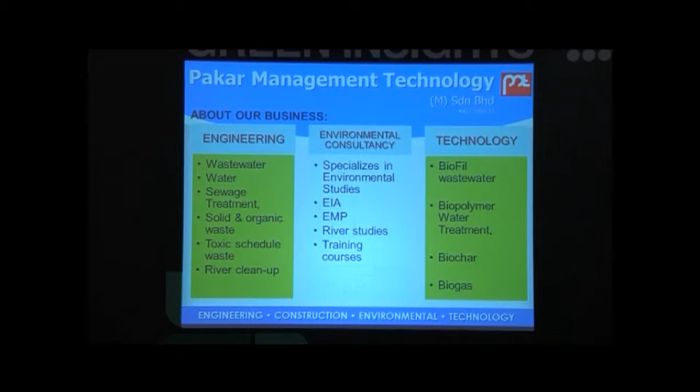On your far left, this is engineering: water, wastewater, turnkey, contractor, consultant. In the middle, EIA. And at the far right, the technology that we are marketing in this hall today. I will elaborate there about 4 or 5, okay?

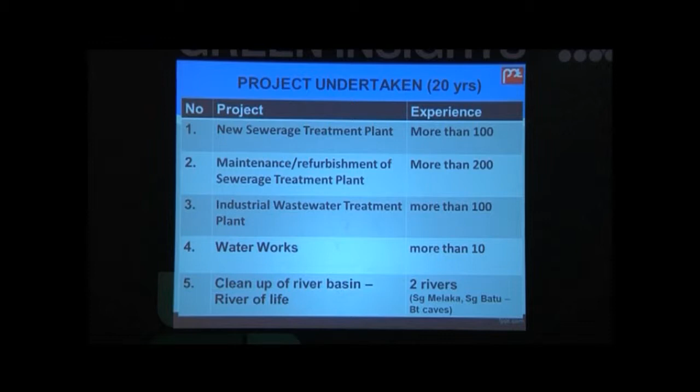The company does sewage treatment as a core business. They do refurbishment and maintenance on STP. They do industrial effluent water treatment, design build. They do water work, and they also do clean up of rivers.

This is the latest addition: Sungai Melaka and Sungai Batu. This is what we do, okay? Clean up of the river, under River of Life.

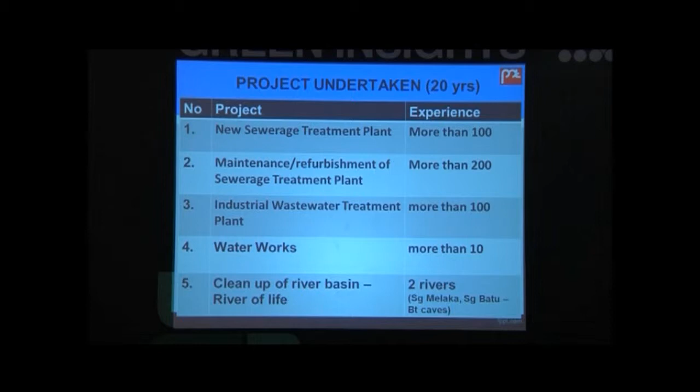What is green, okay? I think most of us know the word go green, but what actually does it mean by go green? So a little bit of some definition. I think some of you may know go green means sustainable approach in today's activity. So in our case, go green means sustainable approach in today's business, waste management, particularly wastewater management.

I'm going to focus on that. But Go Green is also resource recovery, penjimatan sumber, okay? It makes sense for us to protect our resources for the future. Actually, we have to, okay? For the sake of mankind, we got to preserve something for our kids and our young generation.

So, but there is more incentive, more opportunity for us when you do green business. And you are going to have lots of opportunity when you do go green. You will see IGEM is a very big show. For the last 3 years it made very big sales, billions, in terms of opportunity and contact. So it's a good platform to work on.

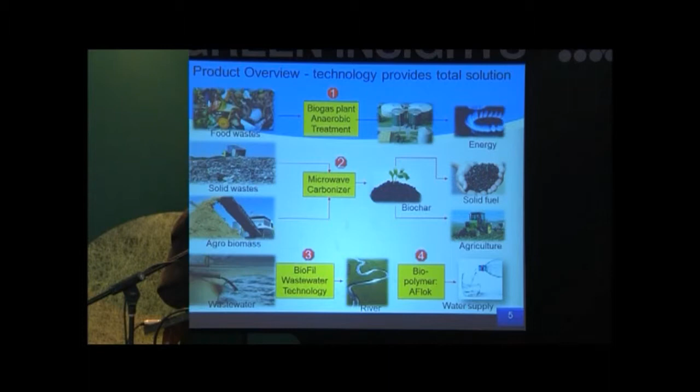Okay, now I'm coming to, because I don't have much time, I'm coming to the overall scenario on what the company offers at the booth there. We are on D80, D80, in Hall 2. I got number 1, which is a biogas plant, solving food waste, on your left, okay?

I got number 2, microwave carbonizer, turning garbage or biomass into charcoal, biochar we call it. We have number 3, treating wastewater from the city, from your sink, from your kitchen, from your industrial wastewater, for discharge. But lately we have the 4th, latest innovation, treating water without any chemical. So we got 4 products. If you are interested in more detail, please go to D80 after this, right?

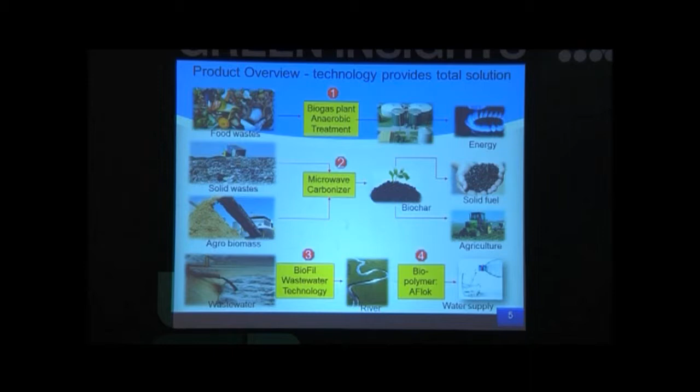Okay, a little bit about the product. What we intended to do, number 1, is to make food waste into biogas. I think it's not new to some of you, but this time we miniaturize. We make things which are big into smaller kits.

So when we talk about biogas, we talk about kitchen waste. We are just focusing on restaurant waste, catering, highway, wet market — very simple application. It is a community project.

Number 2, we have what we call a carbonizer. Actually it's making charcoal, but for the first time we make charcoal from microwave. So you can imagine, in your home, a microwave can later be modified by our team to make a carbonizer, meaning you can make your own charcoal in your own house using your own waste. That's my dream, okay? But we got a 10 ton a day plant in Kelantan. You can see more detail in our book.

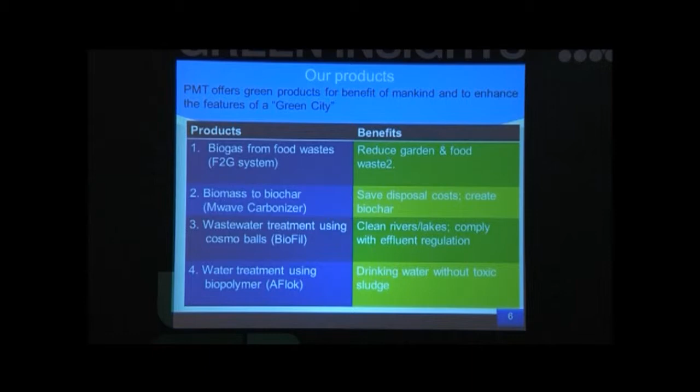Number 3, we are using BioFil. BioFil is a biofilter — we are treating wastewater with half the size that normally people require. This is for sewage treatment plants, also for river cleanup. That's number 3. Number 4, we have natural biopolymer. It's a kind of product developed and produced by microorganisms. We intend to offer an alternative.

If you use alum sulfate for drinking water, now I think there is an alternative. You may not have to use alum. We can have a natural product. We have no sludge, okay? So these are the main highlights.

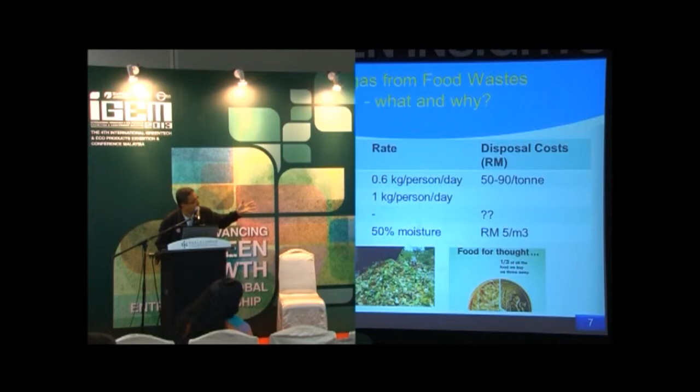Number one, quickly, I think the issue in food waste is always the kilogram. If you are aware, we throw about 0.6 kilo per person per day from every person, but in total we actually throw 1 kilo per person per day. This is the garbage that we throw in.

And then it's always the cost that matters. But since we do not handle costs, the costs are handled by local authority or developers, so it's all silent. But for government, they want this project because of the cost, okay?

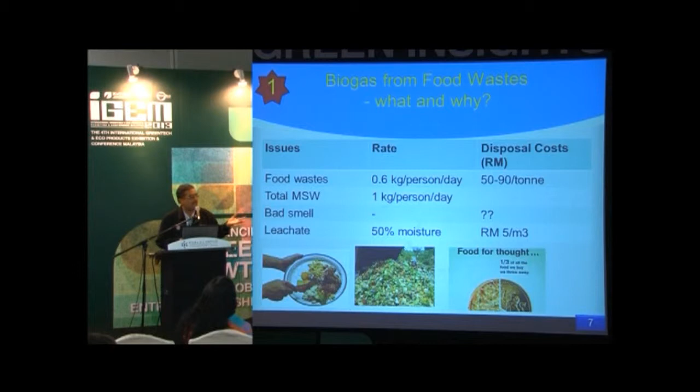And you do not know that there is a leachate. Leachate is the water that comes from our dustbin, which is black liquor, very smelly, and very difficult to treat. It will cost you something like 5 ringgit per ton, and it's going to be lots of tons, okay? So these are the issues.

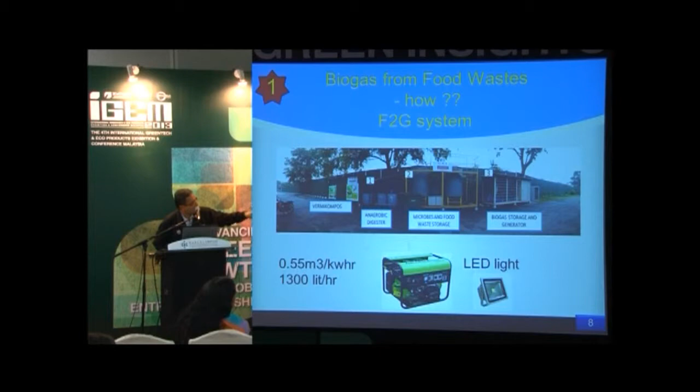How can you solve that? Very easy. We have our project, this is biogas from food waste, F2G, food to biogas. We have 3 cabins there: on the left, it's a vermicompost; in the middle, we have a biogas; and on the far right, we have a 2 kilowatt engine.

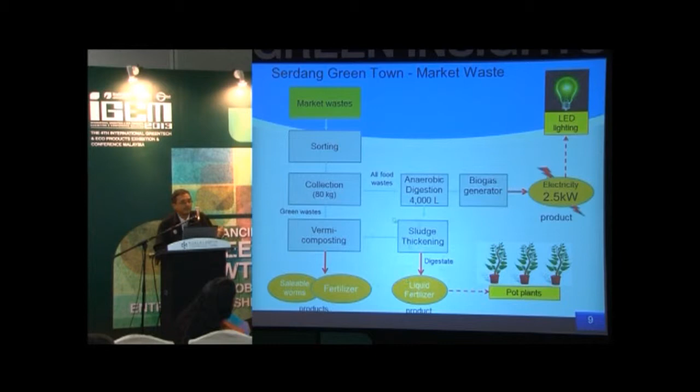Putting into cabin, this is what we do with market waste, okay, from the top market waste. And then we do sorting, and then we have a collection. We can do 80 kilo in a small unit. We can generate 2.5 kilowatt at the far end, okay?

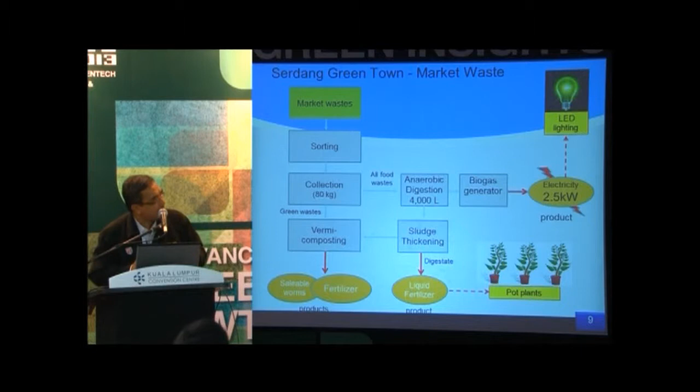So this project is a showcase where the business owner in any hawker center, cafeteria, in this case market, can work together, join hand, okay, with the local authority to generate renewable energy, okay? So this is our Serdang Green Town that we have successfully launched, okay, 1 year ago, okay?

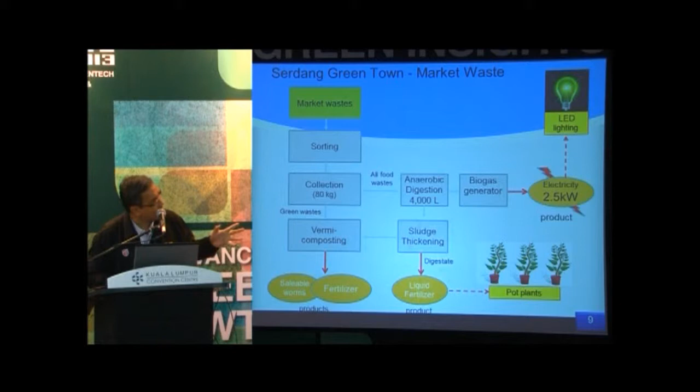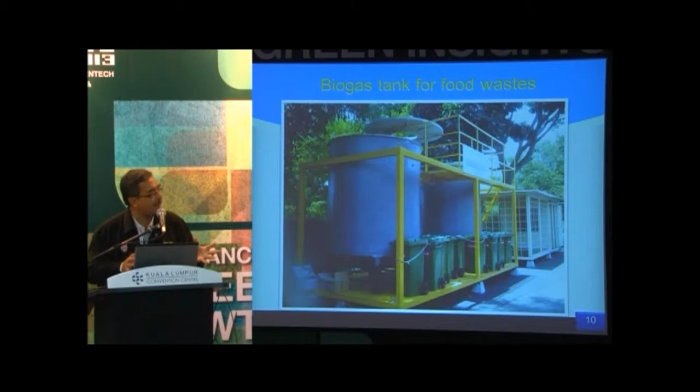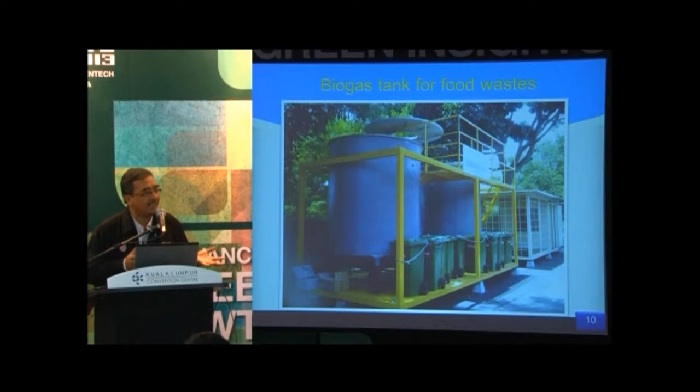This is the kind of project that we do if you have a community who do not have anything to do, but you want the image, we can assist you. Say you got a township of 1,000 people, which is 200 houses, you want to have impact in your community, you want others to know each other, let's come and do work, let's bring our waste there and let's generate biogas, let's work together. So that at last you know each other, you enjoy, and you have the feeling good attitude, you know.

This is the kind of thing that we promote. But you must have some object, something, so we offer you something there for you to come together. It's a point of attraction and focus, okay?

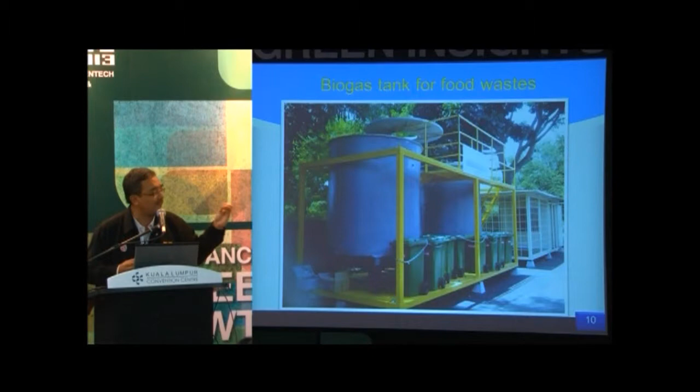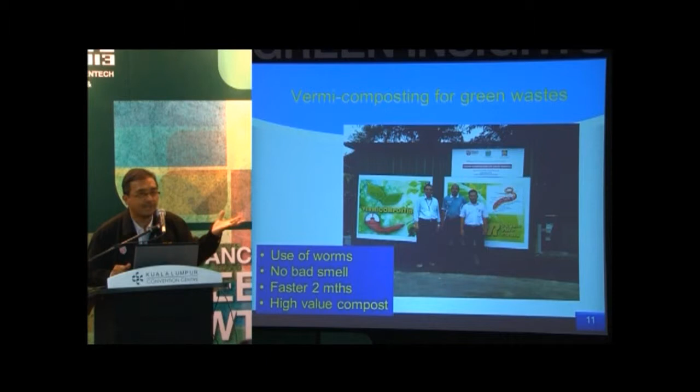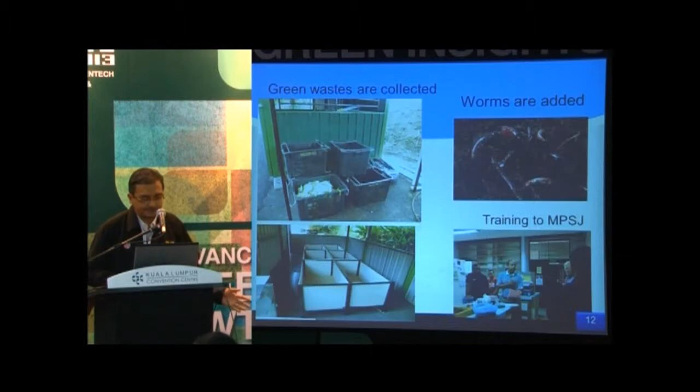We have that kind of vermi bins, also for the food waste, but the green, because the green are special vegetable, okay? We do throw lots of vegetable, and vegetable can be composted in the vermi compost way. No smell. It only takes about 2 months to get your compost, okay? This is the example that we do, okay.

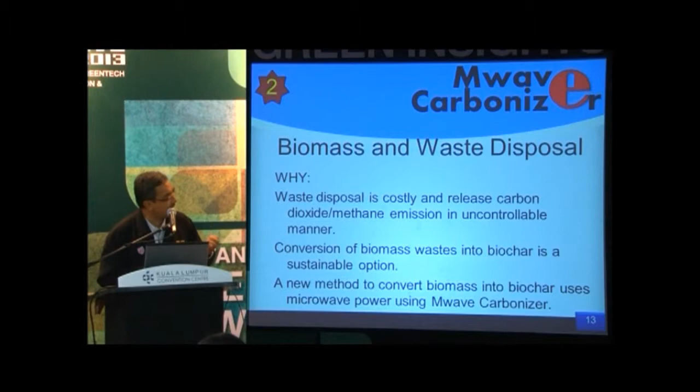From the city, we have the garbage. From Indah Water treatment plant, we have the sludge. Industrial wastewater, we have the sludge. So actually, all the sludge are costly to dispose. Okay, so the issue now is waste disposal.

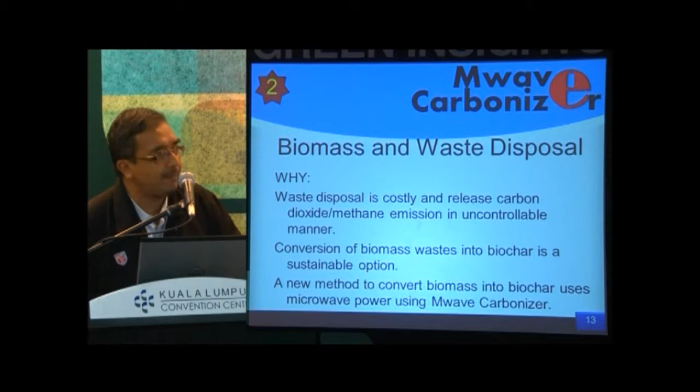One of the departments that handle high cost is always waste disposal. Okay, so we got to think how to remove them in the cheapest way. So there's the whole idea behind this.

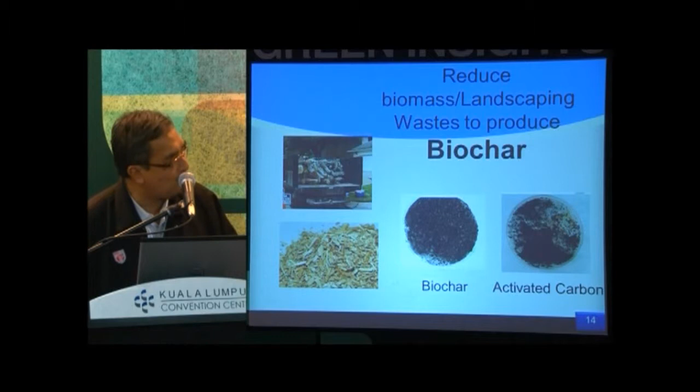So what we do is we can convert this kind of thing, agro, okay, into biochar. But if you are interested, you can also move to activated carbon. It's one step away, all through one equipment. Okay, the microwave that we have is a big microwave, not the normal household one which is only 1 kilowatt.

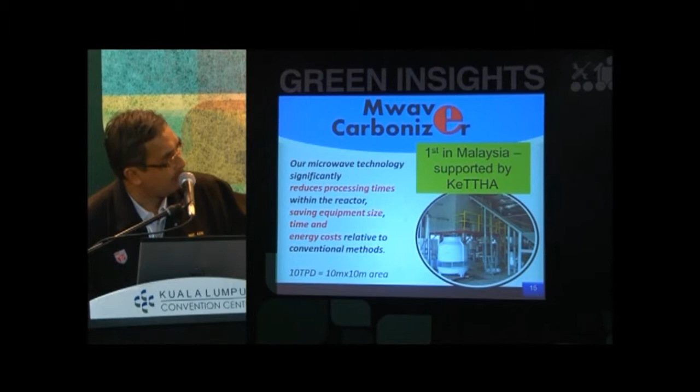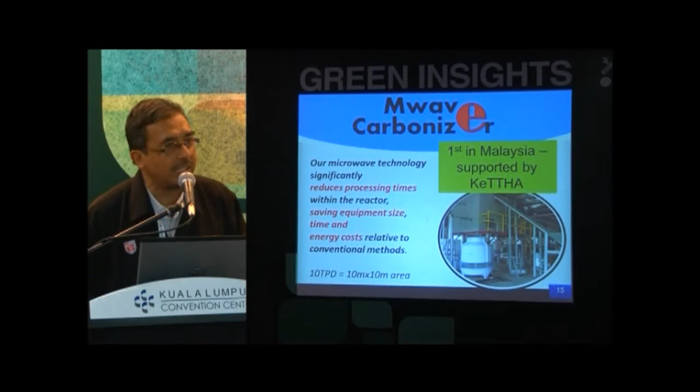We have a 10 kilowatt. We built this, tried to solve IWK water sludge, and we have been able to convert them into charcoal within 1 hour. Traditionally, it takes about 6 hours, so you do it in 1 hour, and you got a good charcoal there.

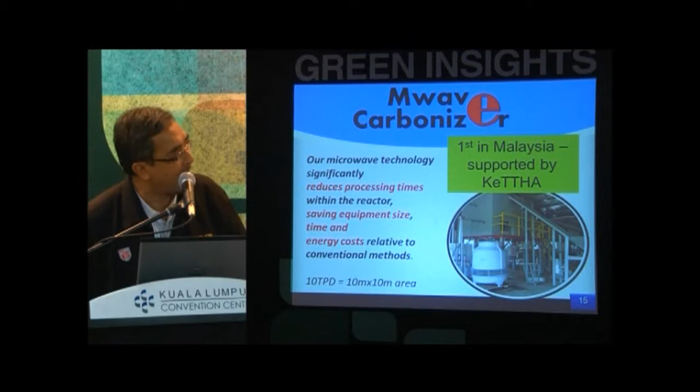This is for 10 ton. It takes only 10 meters, 30 feet by 30 feet size. It's small, compact. You can see this live in Kota Bharu, okay, Kelantan.

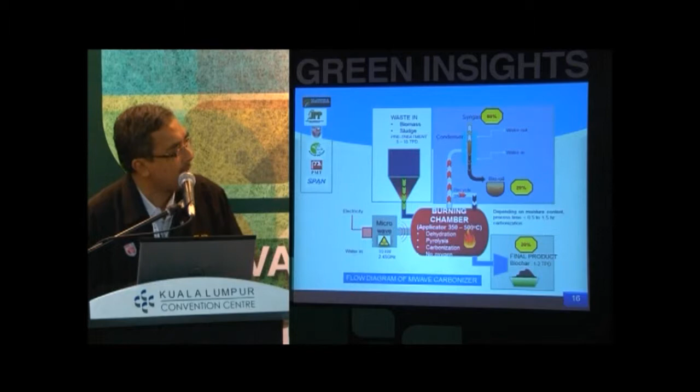This is the details, okay. For those who are interested in the detail, please come to D80, D80. You can find this, but microwaves are special items you cannot find anywhere except in Kelantan today.

Maybe the first one in Malaysia. We are the second after New Zealand for this one, not even in the US, for the full scale.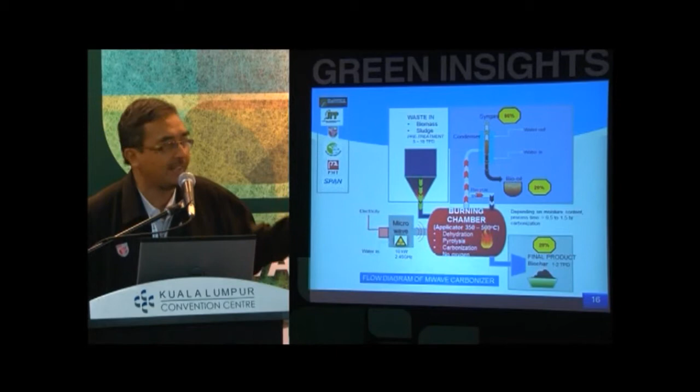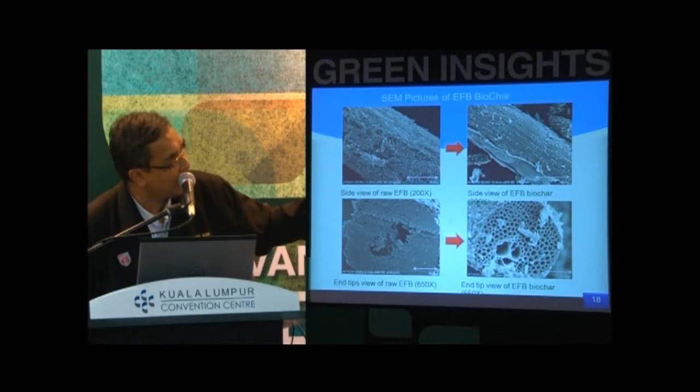You can convert easily from raw empty bunch into biochar. Another appearance on the left, the normal empty bunch in the palm oil industry, and on your right is the charcoal. The beauty about the char on your right is there's a lot of holes, which we call voids.

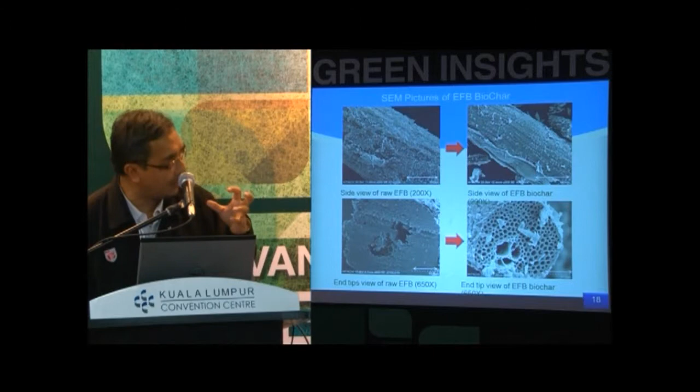That void makes the material have superior properties. In color removal, it performs extremely well. In moisture retention, it does extremely well. In organic removal, it can also do extremely well. So these are the features of biochar.

Why we did the microwave is initially because of disposal, because sludge in the water always has difficulty in disposal. It costs you about 50 ringgit per ton to take it away by truck, and then there are further tipping fees and disposal costs, something like 50 ringgit to even 90 ringgit.

If you employ this kind of technology, there is no more disposal because you don't have sludge or waste anymore, you have charcoal. So if they think about charcoal, this is no longer a waste. You can actually spread your charcoal on the ground if you like, no disposal needed. But smart people will always sell it because charcoal can sell easily at 50 cents or even 1 ringgit per kilo. Or the worst case, you can just burn it for your heat if you want.

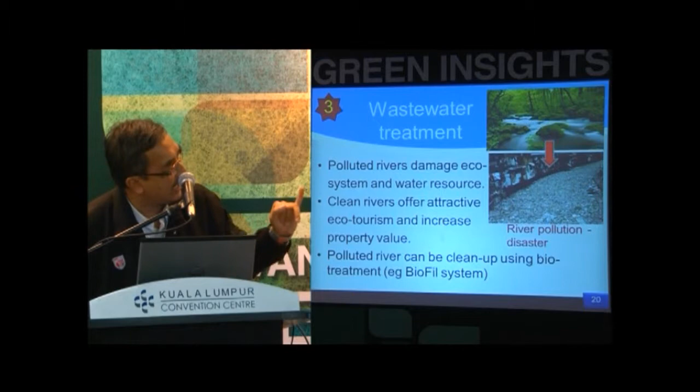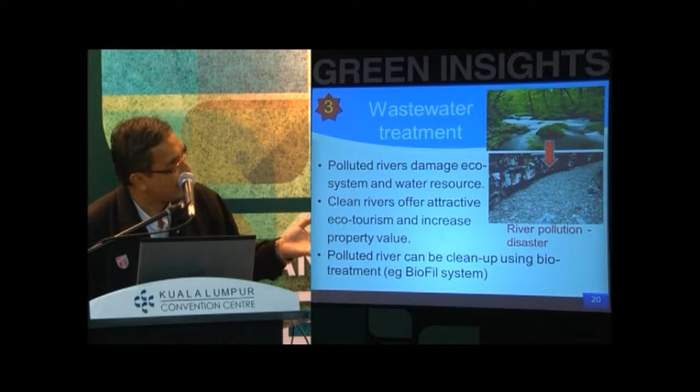So that's the whole idea. Number 3, we are moving very fast. We got another product, wastewater treatment. For those of you interested in wastewater, we can remove pollution - the river on the far right there is very nice, but lately it's become polluted just by garbage and also discharge from toilets, kitchens, hawker centers, Tesco, Giant, and all this eating area. So it did spoil our water body.

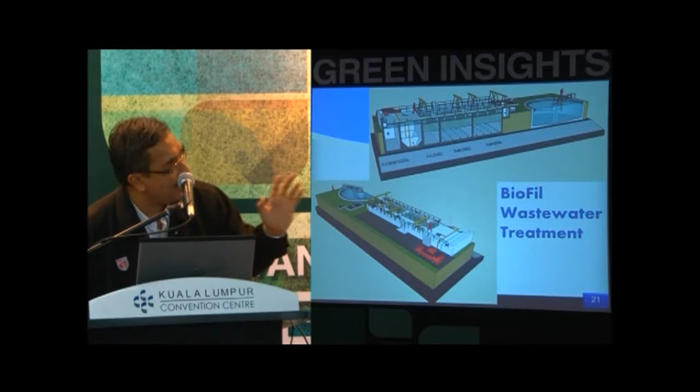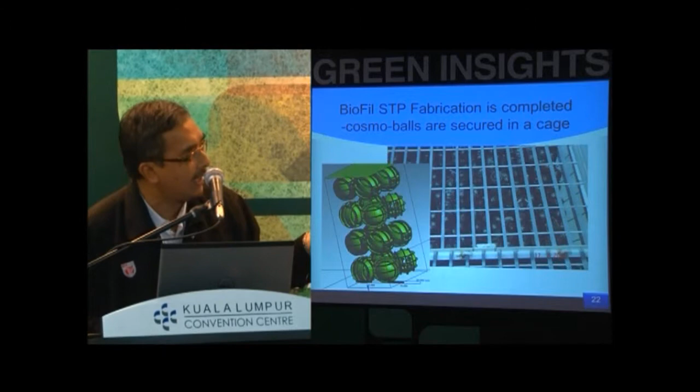So what we do is we come with this invention, BioFil, that consists of several components. The magic thing about this treatment plant is we have this media called Cosmoballs. We're selling Cosmoballs as media to anybody else who requires it. We are using it now for river treatment, we use that also for septic tanks, and we also use that for biological aerobic tanks. So it's a very versatile kind of thing.

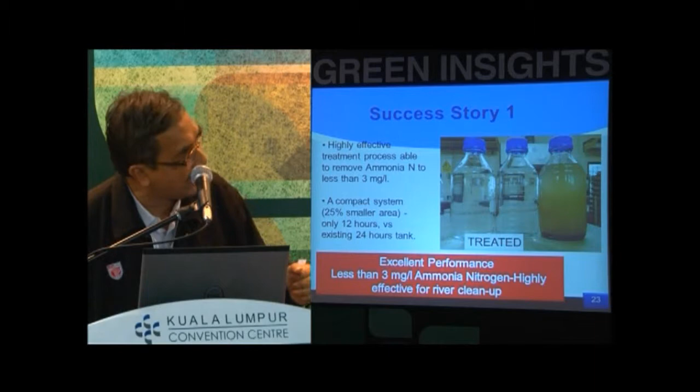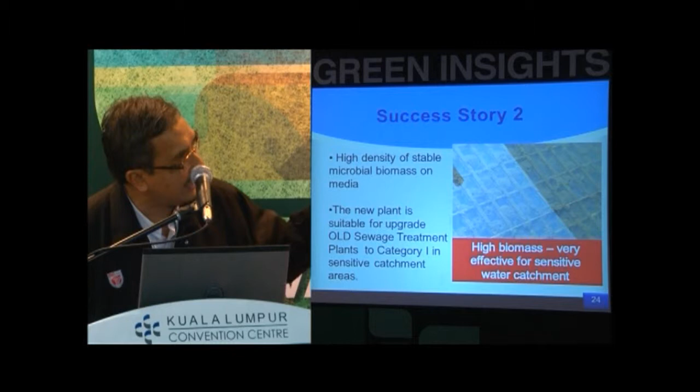How it works is that the media will allow growth of biological film. That's what they need in wastewater, and that's what they need also in river treatment. So there is particularly a very intelligent way of growing bacteria on a very small area. Once you have that in the cage, you're going to make the whole system cut by half.

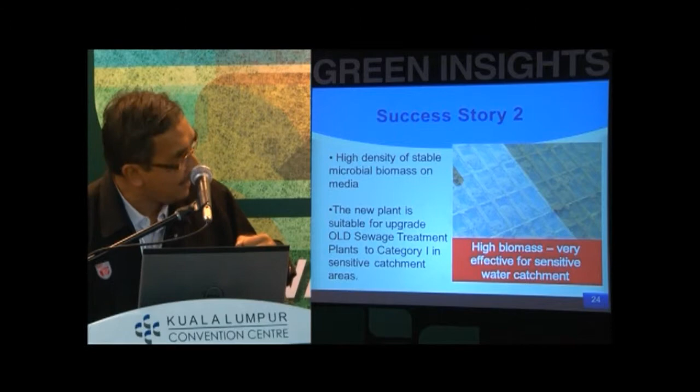And then of course the developers are happy because of low operating costs and easy upgrade. We have the space saving for developers too. This is good for developers, local councils, or contractors who are looking for a compact, smaller unit.

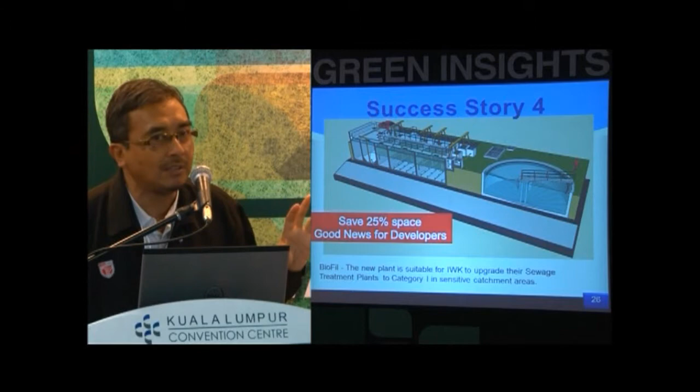We got our latest project in Malacca. If you are free to go to Malacca, it's under construction now. We are doing River of Life near the Taman Laksamana down there. For the first 3-kilometer stretch, we are treating the river using this biofilter system, to be ready by January.

Okay, our big project. This is the way you take the river, the Sungai Malacca. What we do is we cut off and intercept all the discharge from the housing, capture it, treat it, and then discharge. So that way, we are not allowing any single discharge from the city - we are treating them. This is the concept of River of Life.

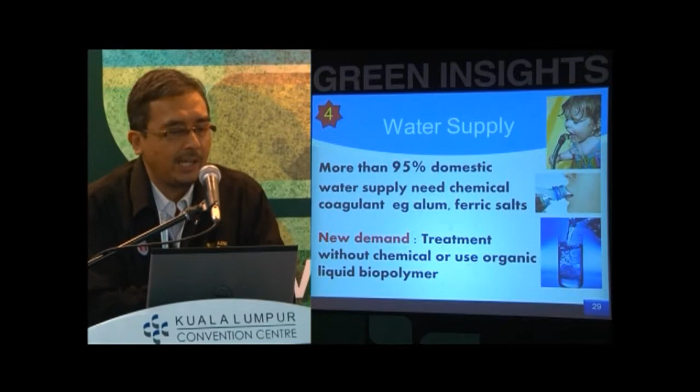The final topic I'm going to talk about today is regarding something good for the water. You realize that more than 95% of our drinking water is treated using chemicals. I think you agree, right? The most common one we call alum, aluminum sulfate. Now they call it PAC, polyaluminum chloride - it's also an alum salt. In difficult cases, they use ferric salt. So these are all highly charged metal ions, aluminum 3+, ferric 3+. These are commonly used because we have to coagulate the turbidity and make the water clear, right?

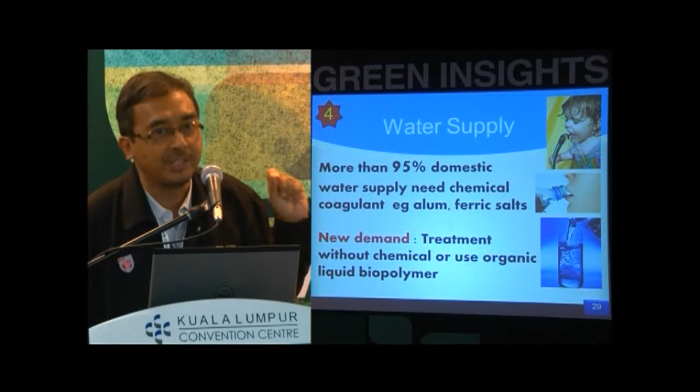So in European cities, they are moving away from this - looking for anything else we can use without alum, without ferric salt, or without metal, the 2+, 3+ ions. Because at the end, many water supply operators have lots of headaches because of alum sludge, toxic waste. Even in Malaysia, more than 400 water treatment plants are facing a question mark now because aluminum salt is going to be categorized as scheduled and toxic, meaning you cannot throw it away. You've got to find a solution right away, because it's been sitting in lagoons for many years. So from now on, something else has got to be used.

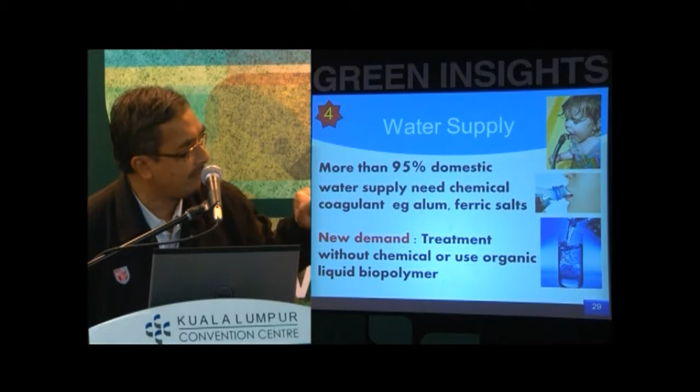They're still looking. You can use RO, you can use membrane, you can use other things, but they're all expensive to operate and maintain. They're cheap to buy but expensive to operate and maintain. So we're coming with a new idea: we're going to treat water without chemicals. Actually, we use something of microbial origin. Later on, I will show you, okay.

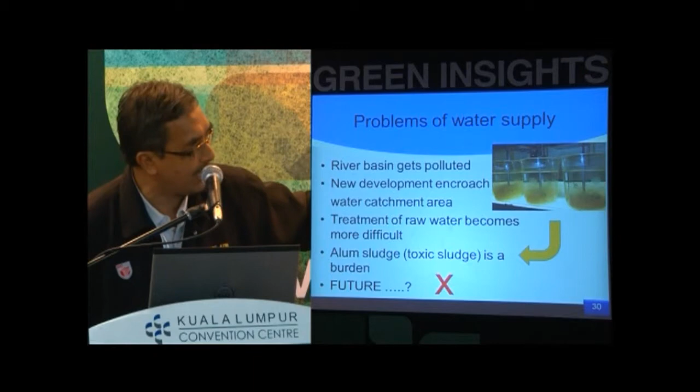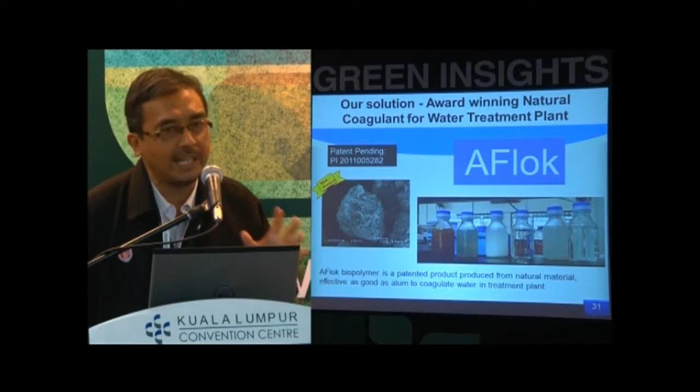The product we have launched is a patented system, AFlok. AFlok is natural - believe me, we got it from fungi, not bacteria, fungi. The fungi you see on bread, something like that, right? It is from there, but we don't actually use the fungi itself for this liquid - we get their juice, the liquid produced by them. So we have the mother culture, and they are all producing for me.

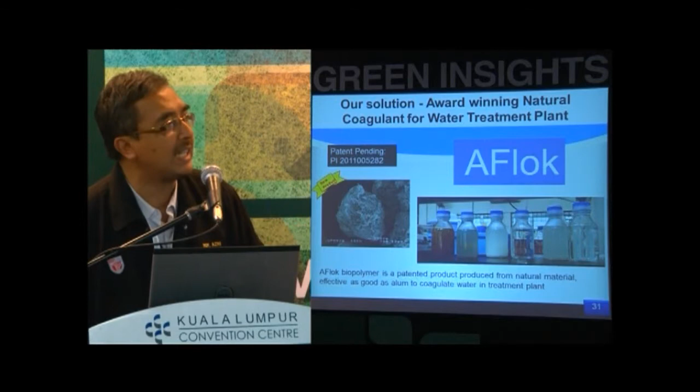So we are able to treat all kinds of water - palm oil wastewater, milk, and river water - the same way, in the same manner, just like alum. But you don't have any alum salt involved in this case, okay?

So this is our example - we do algae removal. Actually, our first research started way back 8 years ago, trying to clean this green-colored pond. To our amazement, we could do it just by adding about 2% of the solution. You can actually remove everything, and then it will settle right to the bottom. So we're able to remove the green algae.

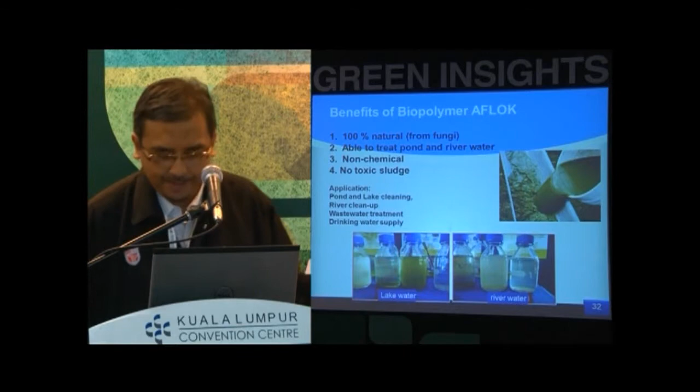From there, we started to develop other products - palm oil, milk, and so on. So it's 100% organic, okay? And you can actually make it from your house, or at the back of your place, you know? You don't have to import anything else now, okay?

One question for our lady: the way we treat water is always to dose chemical all the time, right? So that as the flow comes in, you can treat it, and within half an hour it coagulates, and then you get the clarified water, okay? I use the same facility - I don't throw away all the facility. So if you already have a treatment plant with all the facility, don't worry, don't throw it away. All you do is order the liquid from me.

You don't use alum anymore, that's all. Because I still need to dose every minute, every now and then, at about 1 to 2%. So I'm just dosing liquid now. But this liquid will not form any more alum sludge - it will form organic sludge. That's all.

No, the liquid AFlok is not an organism, it is the product of an organism. I don't put organism into the water, I'm just taking the liquid from the organism, that's all. So it doesn't have any living things now. It passed SIRIM standard, it is non-toxic, but no sludge generation, no growth, no further growth.

The sludge lagoon now, what is your recommendation if we have a sludge lagoon? For the alum sludge? Good question. All the treatment plant operators are calling me asking what to do with your 3 million tons of sludge for the last 10 years, right?